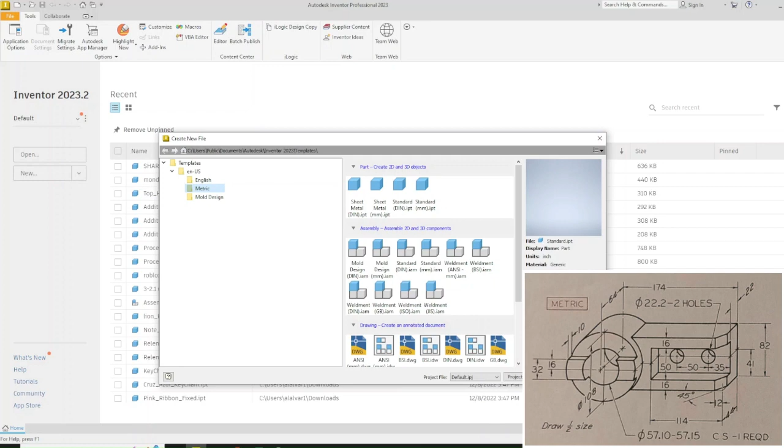Okay guys, in this video, I'm going to be walking you through how to do part number 11, the lever hub. This is a metric part, so we're going to be in the metric system, so make sure you open up a metric IPT. This is a relatively simple part, and whenever you see a drawing that has circles or cylindrical features, that is what you should put on your origin first.

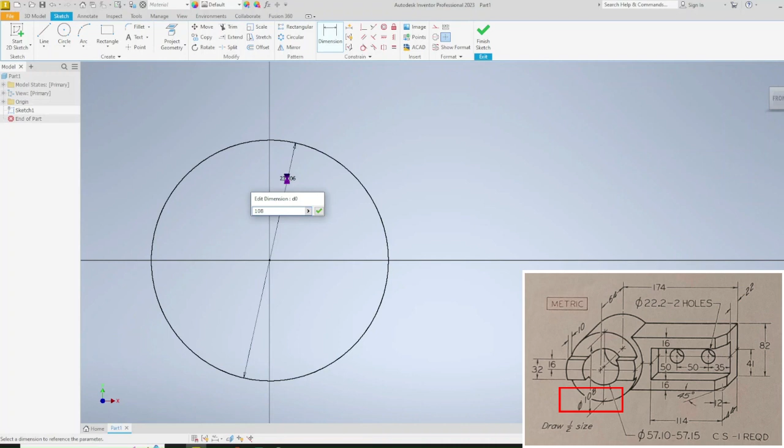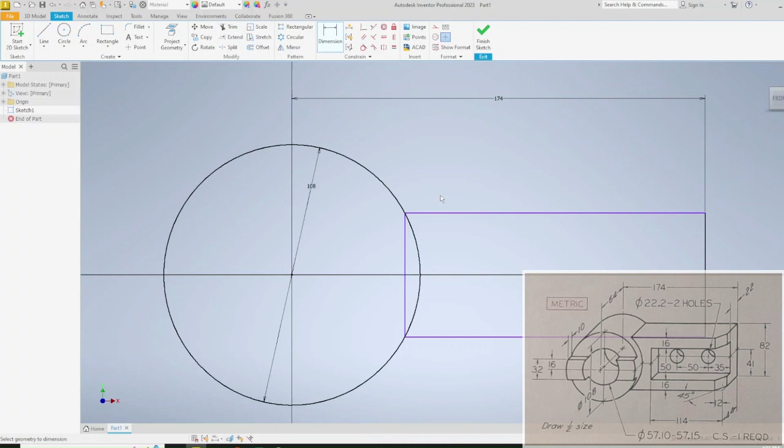So I'm going to go ahead and draw this circle and dimension it at 108 millimeters in diameter, and then put a rectangle like this. I'm going to use my coincident constraints to lock my corners in on my rectangle, and then I'm going to dimension this. From the edge of the rectangle to the center of the circle, that is 174 millimeters. And the height of this rectangle is 82.

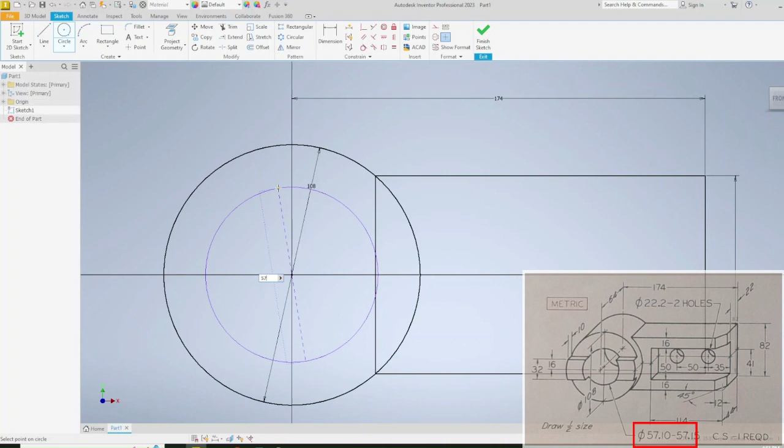Since I locked in these corners on my circle, I can go ahead and assume that everything is in line. I then need to add some circles, so that way I don't have to add them later. This first one is going to have a diameter of 57.1, and then two others that are going to line up right here. These have a diameter of 22.2 and 22.2. I'm going to dimension this circle to be 35 from the edge and then 50 from center to center.

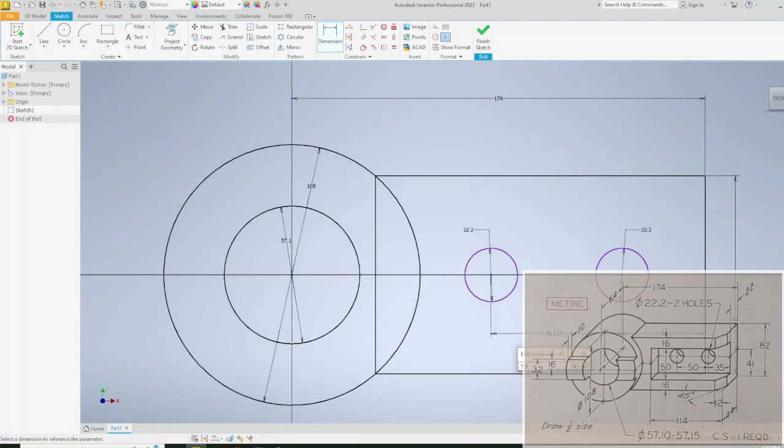And then I want to make sure that everything's in line by using my horizontal constraint. And once that's done, everything turns black and we are ready to extrude. So I'm going to extrude all of my features that I just created by a total of 64.

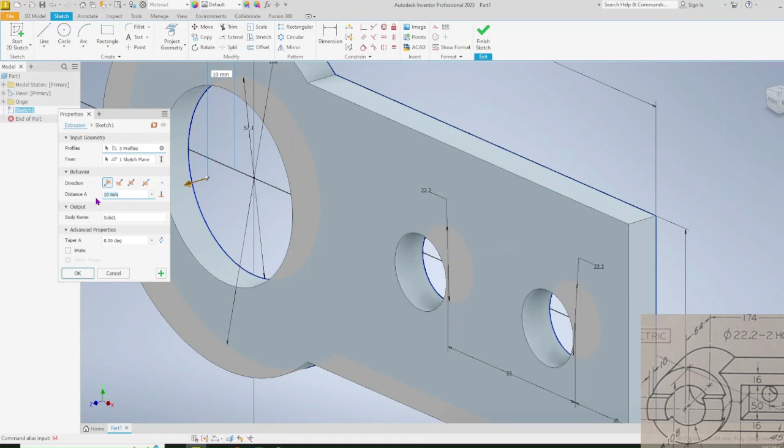There are a lot of cutouts that we need to make, so let's go ahead and start on this face right here. I'm going to project my geometry and create one circle and then a rectangle, like so. I'm then going to trim this because I do need to make sure that everything is dimensioned properly. And from line to line, this is 32. And from line to center, that is 16. I do need to make sure that my circle that I have drawn here is equal with my projected circle, and once that's there, that's all I need for this.

Once you have that, go ahead and finish your sketch, and we are going to extrude. We're going to extrude this by 10. And we're not adding, we are cutting away. Now I know it left us with this shape right here. That's fine, we're going to go ahead and get rid of that right now. So I'm going to project my geometry and use my circle to create a new circle, and then project this geometry.

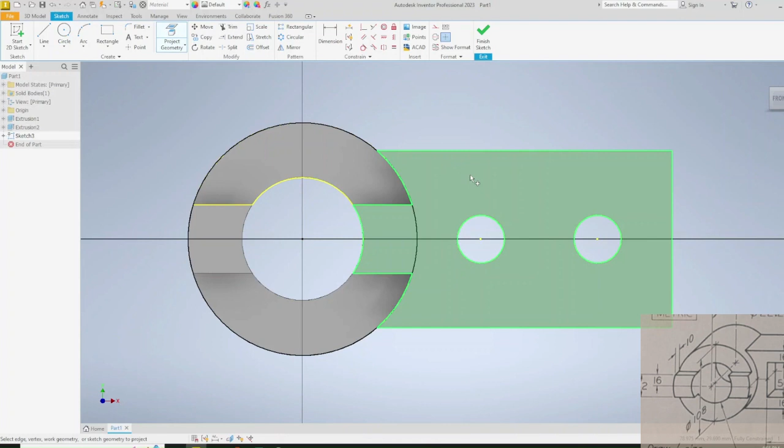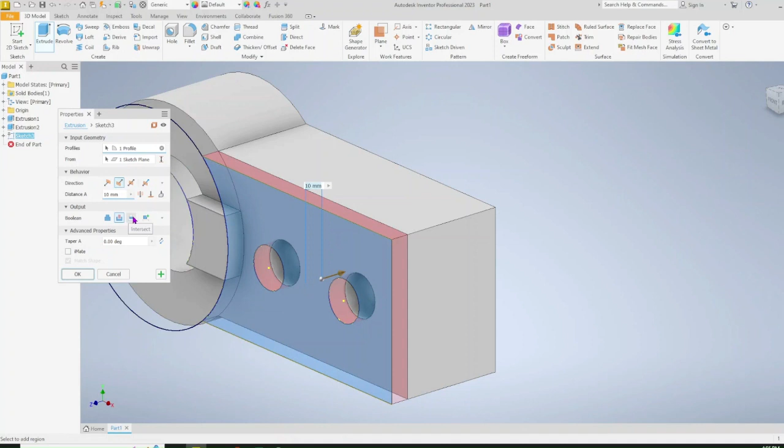And now I can go ahead and extrude. So I'm going to select this, and because we extruded everything by 64, and what we want right here is only going to be 44, I'm going to cut in by 20. Once you have that, go ahead and say OK. I do want to add a chamfer right here. This chamfer has a size of 12. And once you have that, say OK, and now we can go ahead and make that cutout.

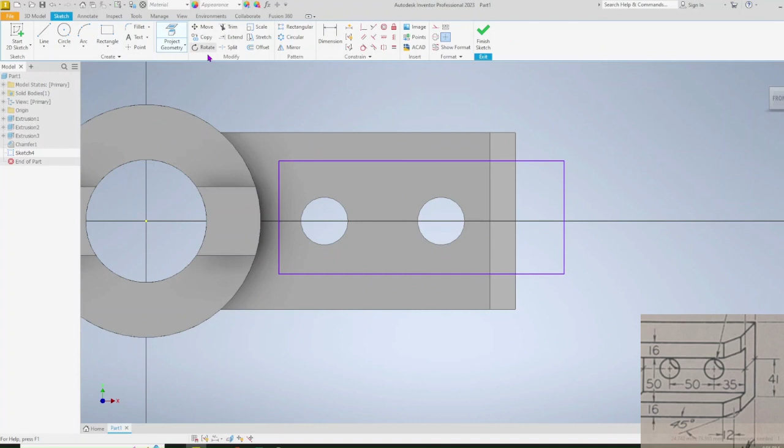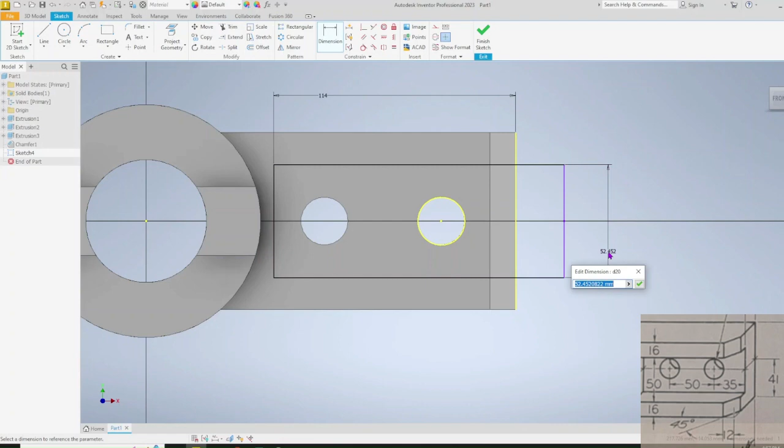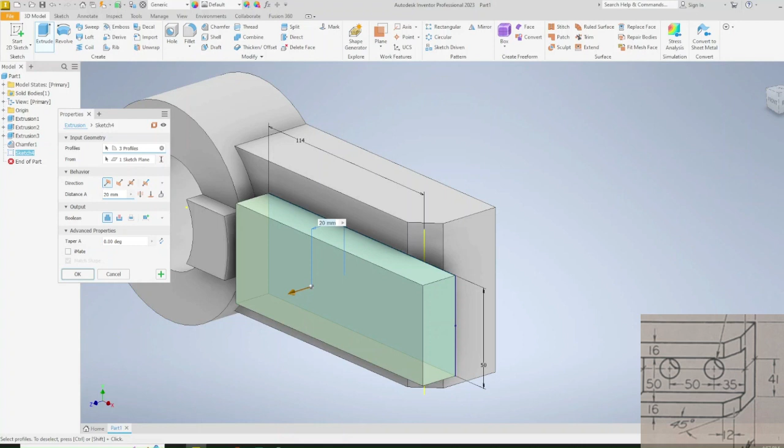No matter how you add your chamfer, it doesn't matter as long as they are correct. So I'm going to go ahead and line up my circle with the center point of this line, and then from this edge to the edge of my rectangle, this is 114, and it has a width or a height of 50. Now once you have that, go ahead and extrude this, and I'm just going to highlight everything, and we are cutting into this part by 20. How I got that was we originally extruded it by 64, we cut back to 44, and this total is 20. And that is all that we need, like this.

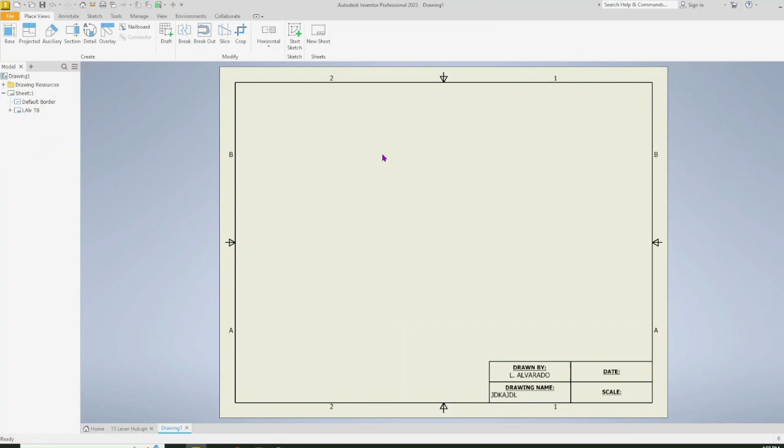I know I went about this a different way, but like I said with Inventor, any way that you do this is perfectly fine as long as you get to the final correct shape. So go ahead and save this. Once you have saved it, go ahead and place it on a title block, and we can go ahead and put this at 1/2 scale. If it's anything larger than that, it probably won't fit. So we need our front view, our top view, and our side view, and say OK.

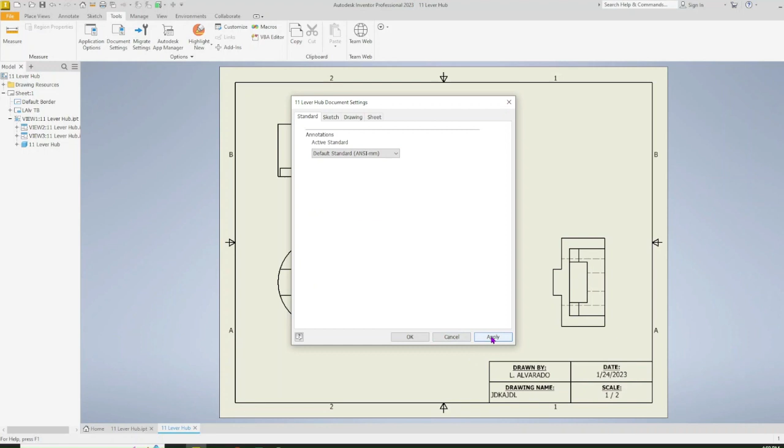And before we start adding any dimensions, make sure that you go to Tools, Document Settings, Active Standard, our default ANSI MM, apply, and close. Now we can go ahead and start adding dimensions. But first, we need to add center lines. Center lines are very important. Make sure that you add them to every drawing that has cylindrical or circular features.

Now you can go ahead and start adding dimensions, and you can do this however you see fit. Make sure that you add all of the correct dimensions, that you add a note that says this is in the metric system. Make sure that you also count all correct dimensions and that your dimensions match up with my dimensions. If you guys have any questions, please let me know, and I'll see you guys in the next video.